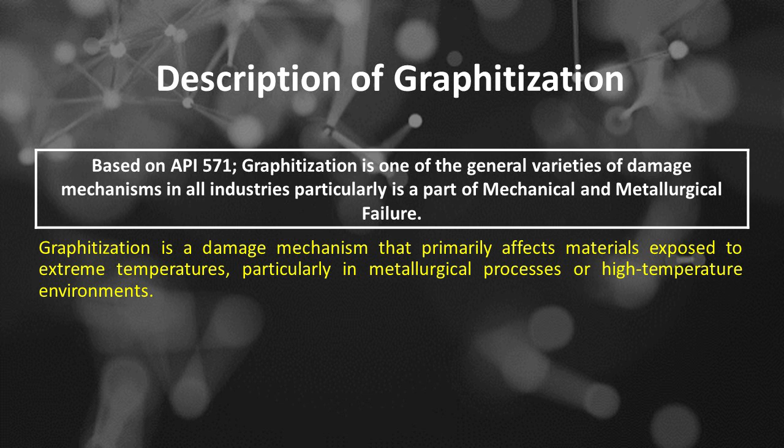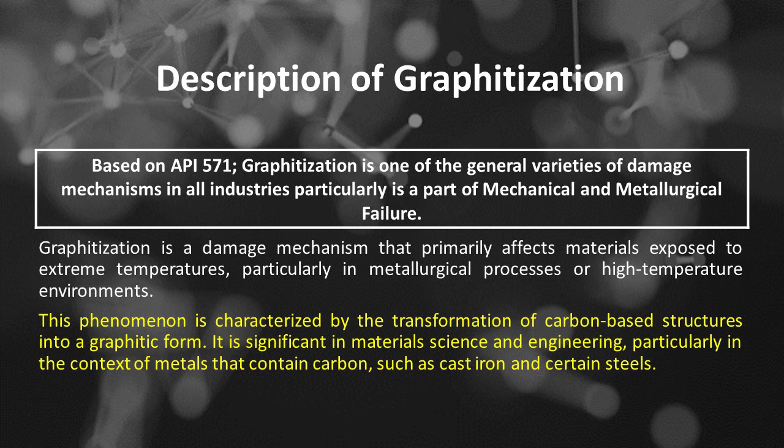Graphitization is a damage mechanism that primarily affects materials exposed to extreme temperatures, particularly in metallurgical processes or high-temperature environments. This phenomenon is characterized by the transformation of carbon-based structures into a graphitic form. It is significant in materials science and engineering, particularly in metals that contain carbon, such as cast iron and certain steels. There are some mechanisms of graphitization.

Number 1 is thermal activation. Graphitization typically occurs at elevated temperatures, usually above 1000 degrees Fahrenheit. At these temperatures, the carbon atoms in a material can become highly mobile, allowing them to rearrange themselves into a graphitic structure.

Number 2 is carbon redistribution. During graphitization, carbon atoms can migrate within the matrix of the material. This redistribution can lead to the formation of graphite particles, which disrupts the original microstructure of the material.

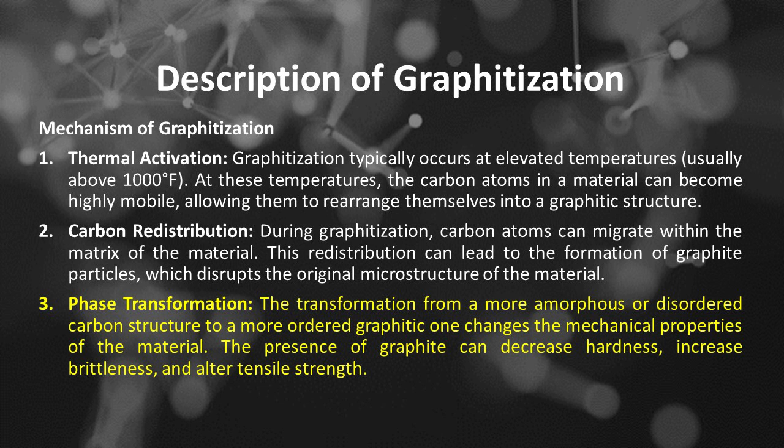Number 3 is phase transformation. The transformation from a more amorphous or disordered carbon structure to a more ordered graphitic one changes the mechanical properties of the material. The presence of graphite can decrease hardness, increase brittleness, and alter tensile strength.

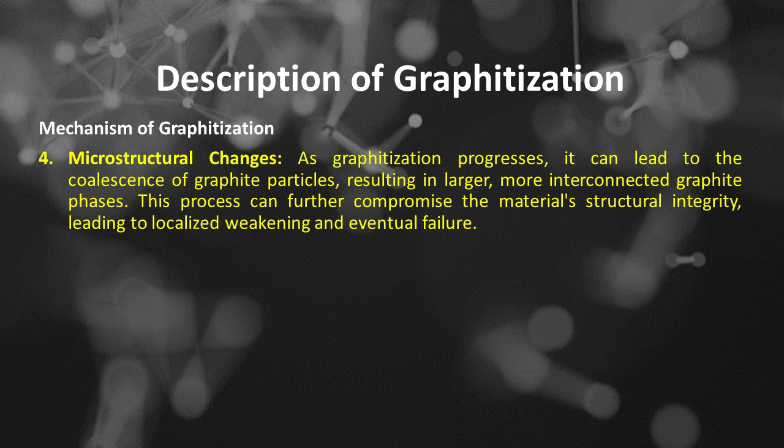Number 4 is microstructural changes. As graphitization progresses, it can lead to the coalescence of graphite particles, resulting in larger, more interconnected graphite phases. This process can further compromise the material's structural integrity, leading to localized weakening and eventual failure.

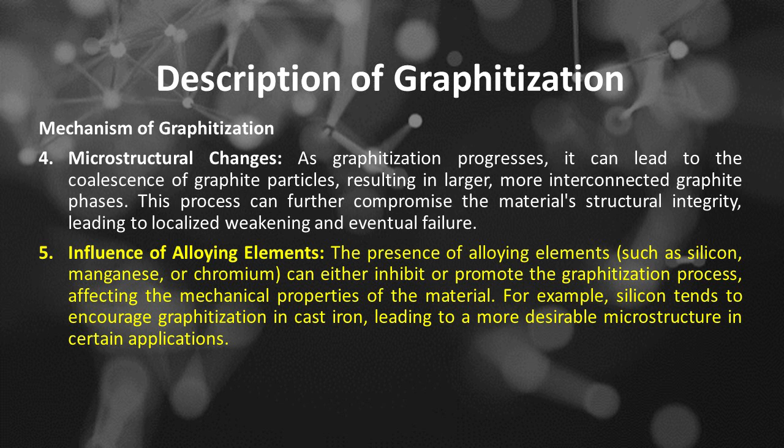Number 5 is influence of alloying elements. The presence of alloying elements, such as silicon, manganese, or chromium, can either inhibit or promote the graphitization process, affecting the mechanical properties of the material. For example, silicon tends to encourage graphitization in cast iron, leading to a more desirable microstructure in certain applications.

Implications of graphitization damage. Number 1 is mechanical property changes. The formation of graphite can significantly alter the mechanical properties of the material, affecting its hardness, strength, and ductility.

Number 2 is thermal conductivity. Graphitic structures typically have high thermal conductivity, which can affect heat dissipation in engineered components.

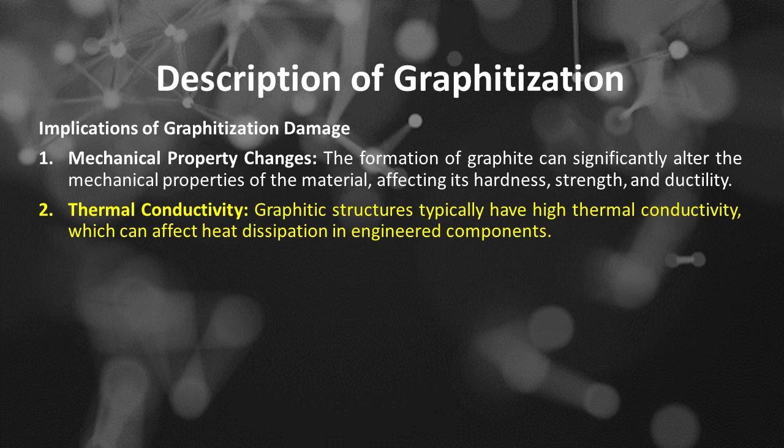Number 3 is fracture behavior. The presence of graphite can lead to changes in the fracture behavior of the material, making it more prone to brittle fracture under certain loading conditions.

Number 4 is service lifespan. In high-temperature applications, graphitization can lead to premature failure of components, impacting their service life and reliability.

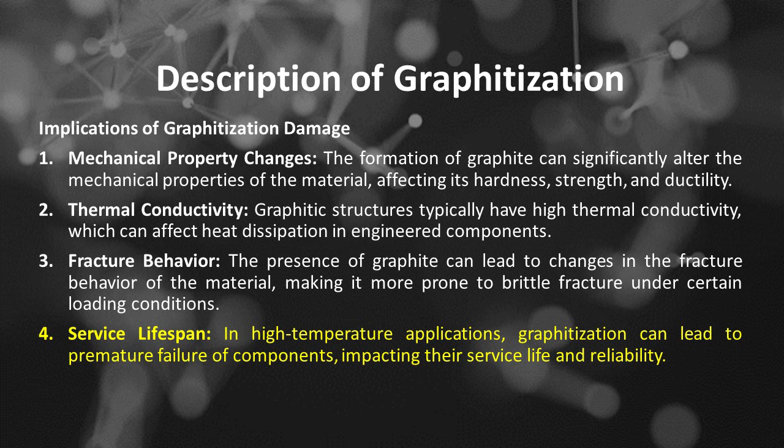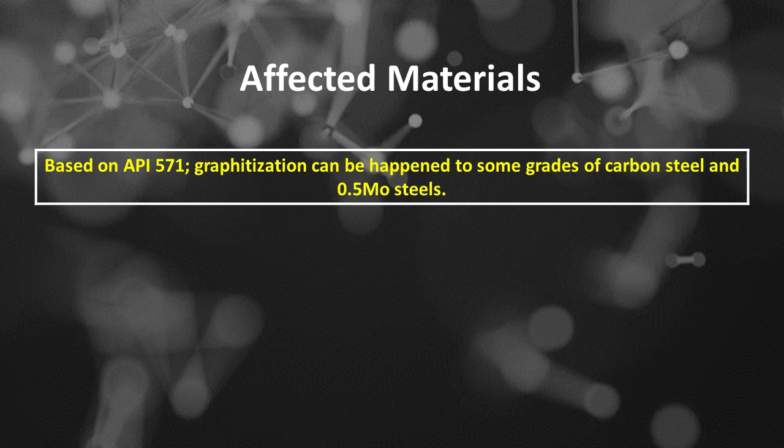Affected materials. Based on API 571, graphitization can happen to some grades of carbon steel and 0.5 Mo steels. Graphitization damage is a process primarily associated with materials that undergo changes in their microstructure due to exposure to high temperatures, particularly in the presence of carbon-containing environments.

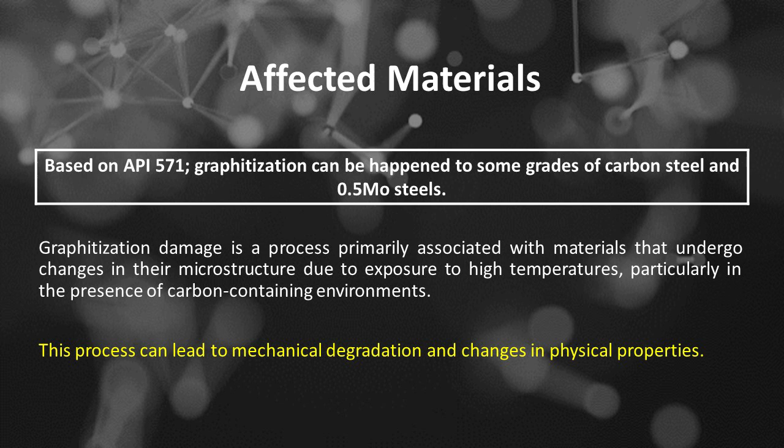This process can lead to mechanical degradation and changes in physical properties. In general, the affected materials typically include: Number 1 is graphite and carbon-based materials. Graphitization directly affects materials that contain carbon, such as graphite electrodes, carbon composites, and various carbonaceous materials used in industrial applications.

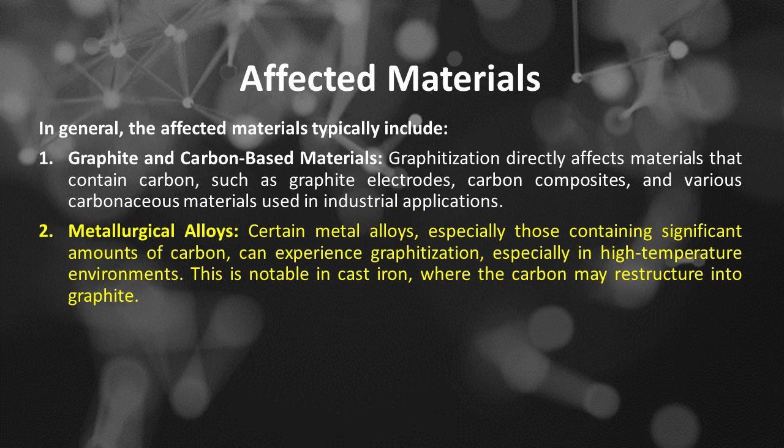Number 2 is metallurgical alloys. Certain metal alloys, especially those containing significant amounts of carbon, can experience graphitization, especially in high-temperature environments. This is notable in cast iron, where the carbon may restructure into graphite.

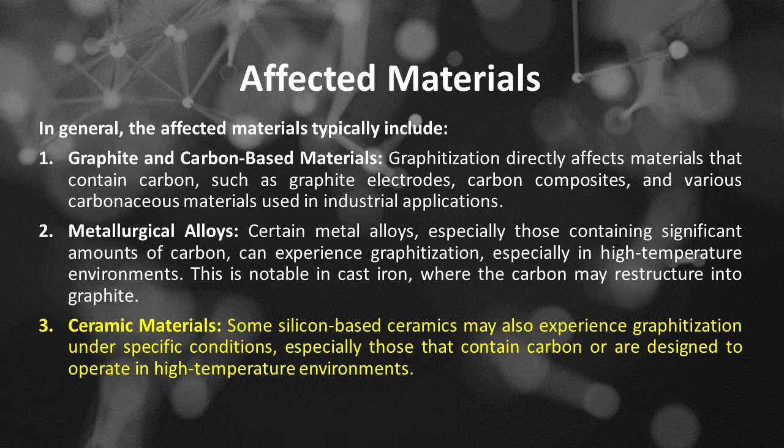Number 3 is ceramic materials. Some silicon-based ceramics may also experience graphitization under specific conditions, especially those that contain carbon or are designed to operate in high-temperature environments. Number 4 is composite materials.

Polymer matrix composites that have carbon fillers or coatings can undergo changes in their properties due to graphitization when exposed to high temperatures, altering their mechanical strength and thermal stability.

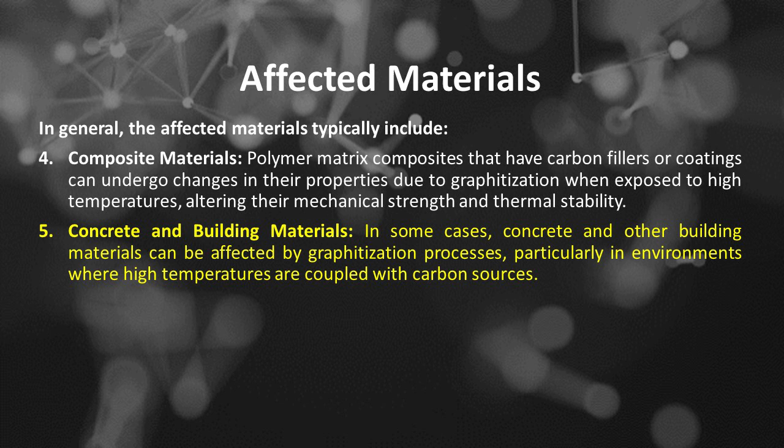Number 5 is concrete and building materials. In some cases, concrete and other building materials can be affected by graphitization processes, particularly in environments where high temperatures are coupled with carbon sources.

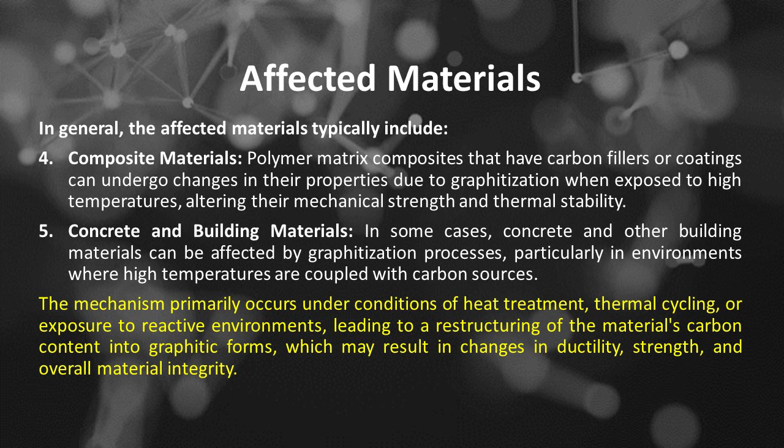The mechanism primarily occurs under conditions of heat treatment, thermal cycling, or exposure to reactive environments, leading to a restructuring of the material's carbon content into graphitic forms, which may result in changes in ductility, strength, and overall material integrity.

Critical factors of graphitization. Graphitization is the process where carbon materials transition to a graphitic structure, and can be influenced by various damage mechanisms, particularly in the context of materials science and engineering. There are several, 12, critical factors that can contribute to graphitization damage mechanisms.

Number 1 is temperature. Elevated temperatures can accelerate graphitization processes and affect the stability of carbon structures. At high temperatures, carbon atoms may rearrange, which can lead to defects and weaken the material.

Number 2 is pressure. The application of pressure can influence the density and structural integrity of carbon materials. In some cases, high pressure can promote graphitization, while in others, it can lead to unwanted structural transformations.

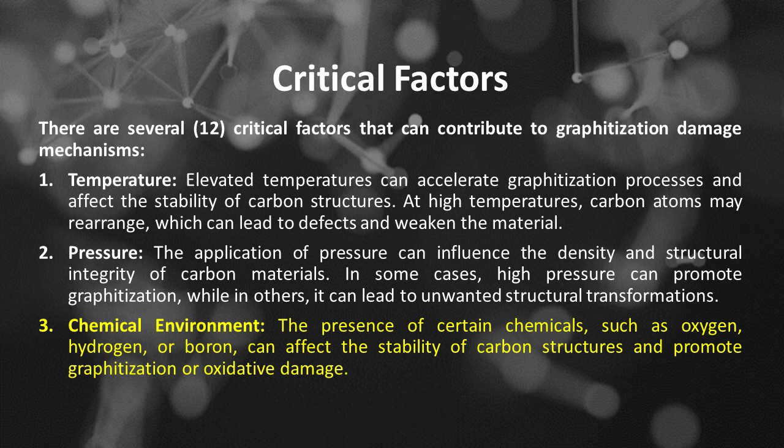Number 3 is chemical environment. The presence of certain chemicals, such as oxygen, hydrogen, or boron, can affect the stability of carbon structures and promote graphitization or oxidative damage. Number 4 is impurities and doping.

The presence of impurities can disrupt the carbon lattice and facilitate structural defects during graphitization. Doping with other elements can alter the electrical and physical properties of the material, impacting its overall performance and longevity.

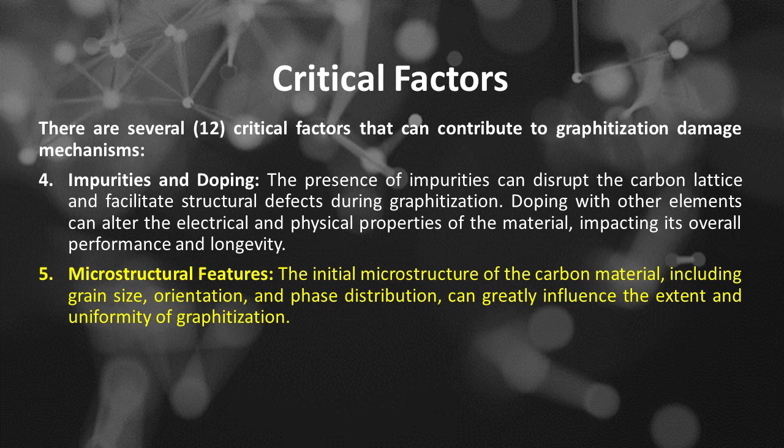Number 5 is microstructural features. The initial microstructure of the carbon material, including grain size, orientation, and phase distribution, can greatly influence the extent and uniformity of graphitization.

Number 6 is mechanical stress. External mechanical stresses can introduce cracks and dislocations in carbon materials, which can act as sites for graphitization or may hinder the process, leading to localized damage.

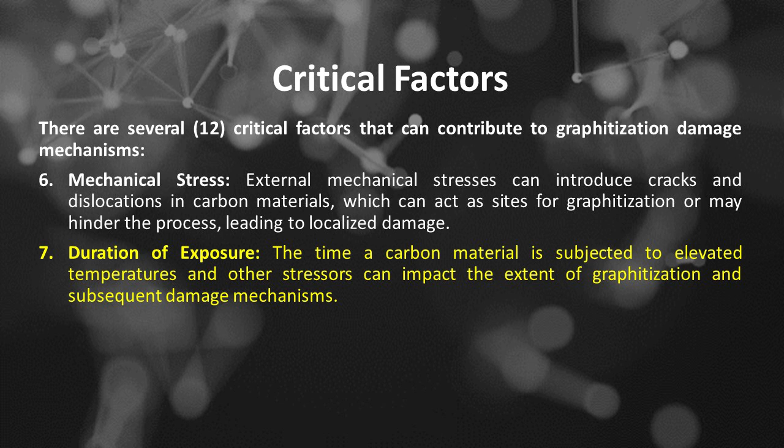Number 7 is duration of exposure. The time a carbon material is subjected to elevated temperatures and other stressors can impact the extent of graphitization and subsequent damage mechanisms.

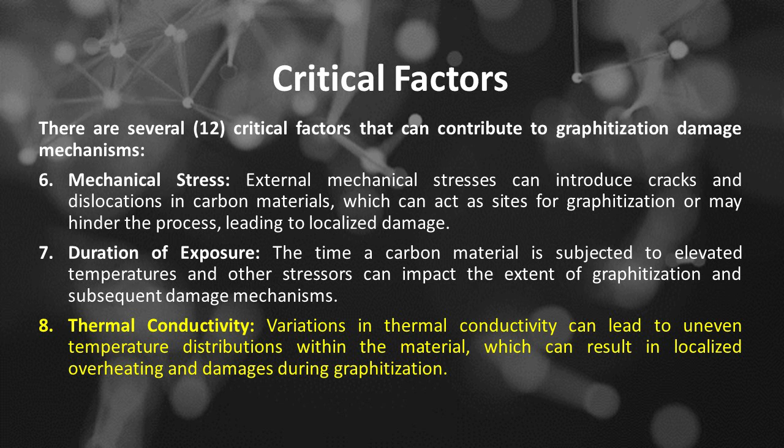Number 8 is thermal conductivity. Variations in thermal conductivity can lead to uneven temperature distributions within the material, which can result in localized overheating and damages during graphitization.

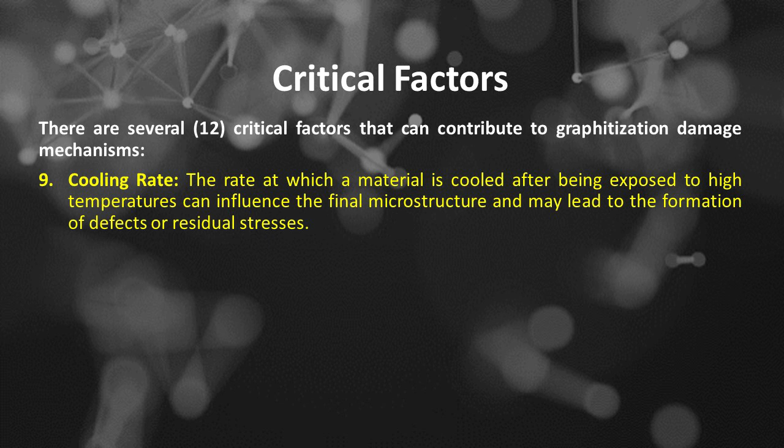Number 9 is cooling rate. The rate at which a material is cooled after being exposed to high temperatures can influence the final microstructure and may lead to the formation of defects or residual stresses.

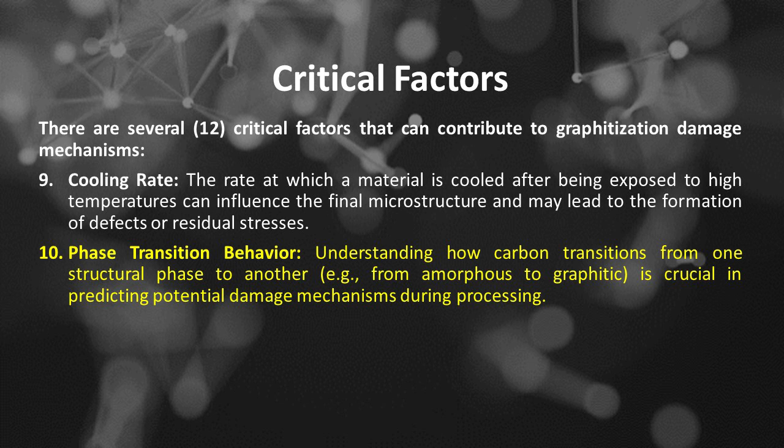Number 10 is phase transition behavior. Understanding how carbon transitions from one structural phase to another, e.g., from amorphous to graphitic, is crucial in predicting potential damage mechanisms during processing.

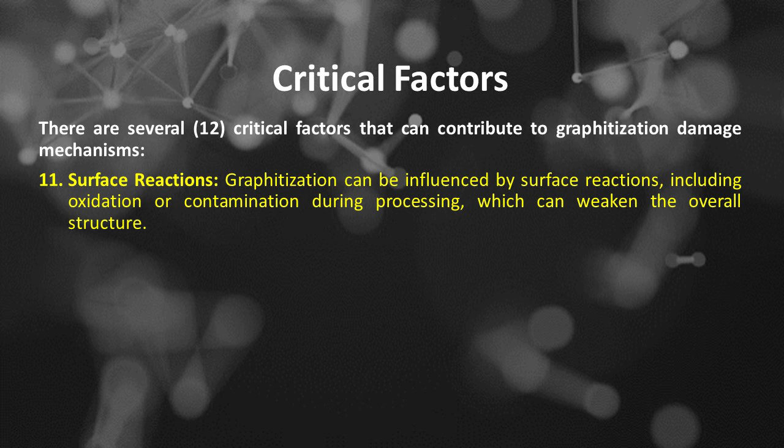Number 11 is surface reactions. Graphitization can be influenced by surface reactions, including oxidation or contamination during processing, which can weaken the overall structure. Number 12 is electrical and thermal properties. Changes in properties like thermal expansion, electrical conductivity, and thermal shock resistance can affect material integrity during the graphitization process.

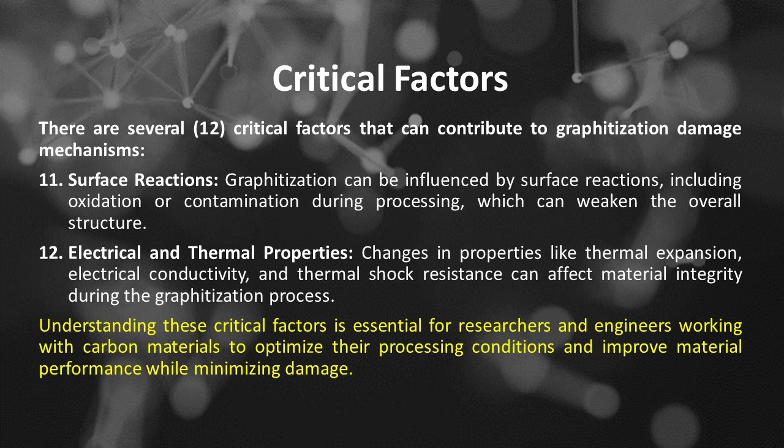Understanding these critical factors is essential for researchers and engineers working with carbon materials to optimize their processing conditions and improve material performance while minimizing damage.

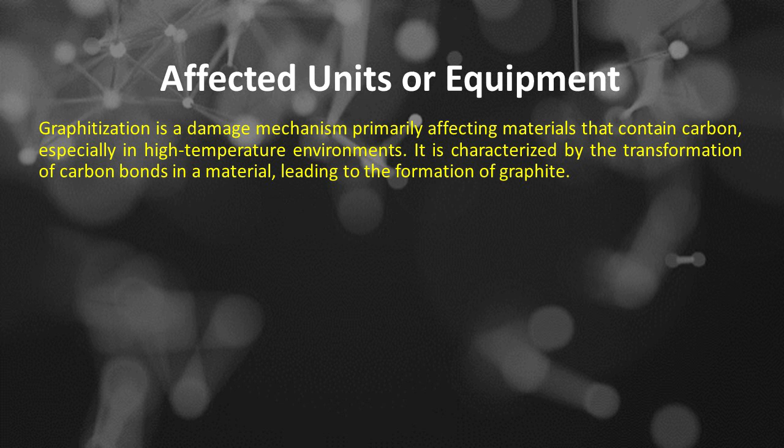Graphitization affected units or equipment. Graphitization is a damage mechanism primarily affecting materials that contain carbon, especially in high-temperature environments. It is characterized by the transformation of carbon bonds in a material, leading to the formation of graphite.

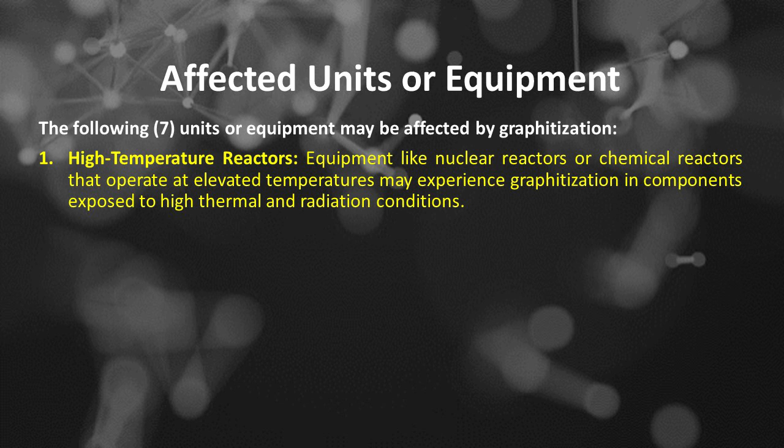The following 7 units or equipment may be affected by graphitization. Number 1 is high-temperature reactors. Equipment like nuclear reactors or chemical reactors that operate at elevated temperatures may experience graphitization in components exposed to high thermal and radiation conditions. Number 2 is heat exchangers.

In certain processes, heat exchangers made of carbon-containing materials may undergo graphitization, affecting their efficiency and structural integrity. Number 3 is pipelines and pressure vessels.

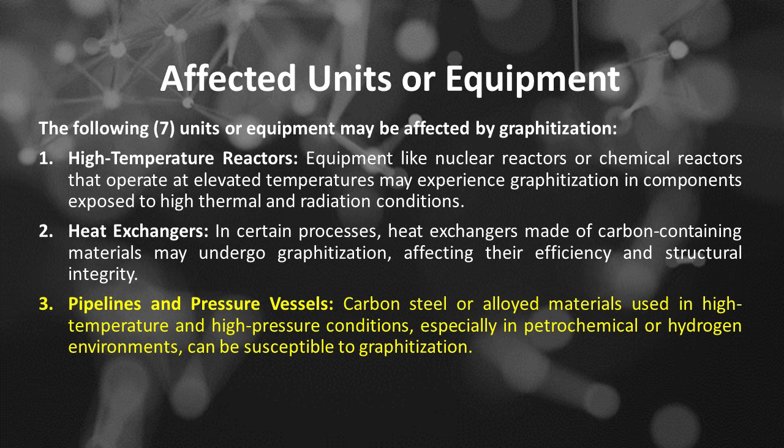Carbon steel or alloyed materials used in high temperature and high pressure conditions, especially in petrochemical or hydrogen environments, can be susceptible to graphitization. Number 4 is boilers.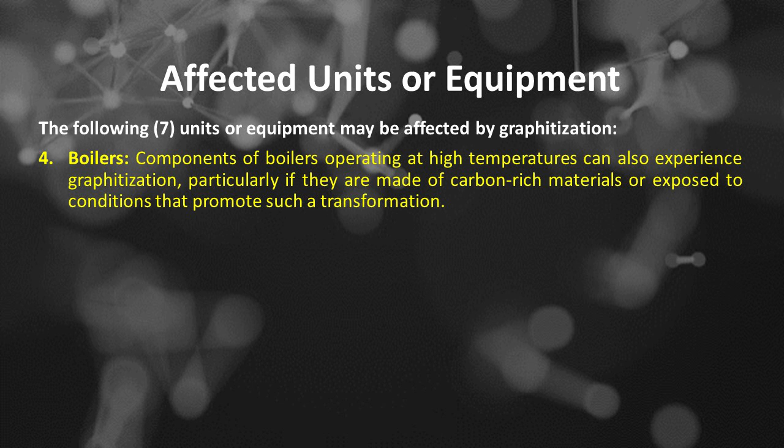Components of boilers operating at high temperatures can also experience graphitization, particularly if they are made of carbon-rich materials or exposed to conditions that promote such a transformation. Number 5 is turbine components.

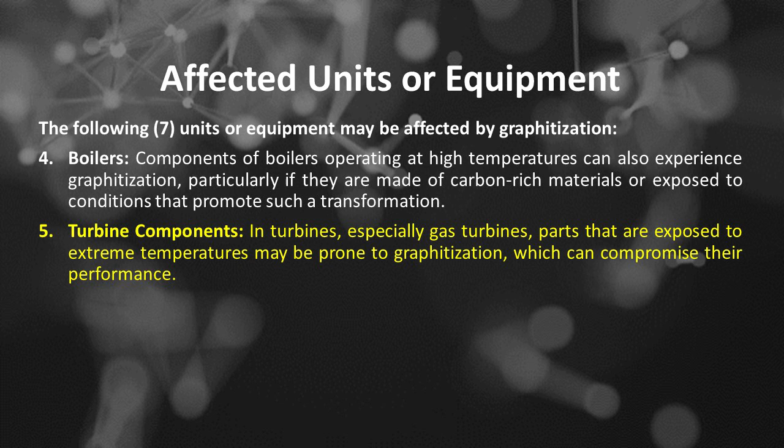In turbines, especially gas turbines, parts that are exposed to extreme temperatures may be prone to graphitization, which can compromise their performance. Number 6 is reforming units.

Equipment used in processes like catalytic reforming in refineries may be at risk due to high operational temperatures and the presence of carbon. Number 7 is coking units.

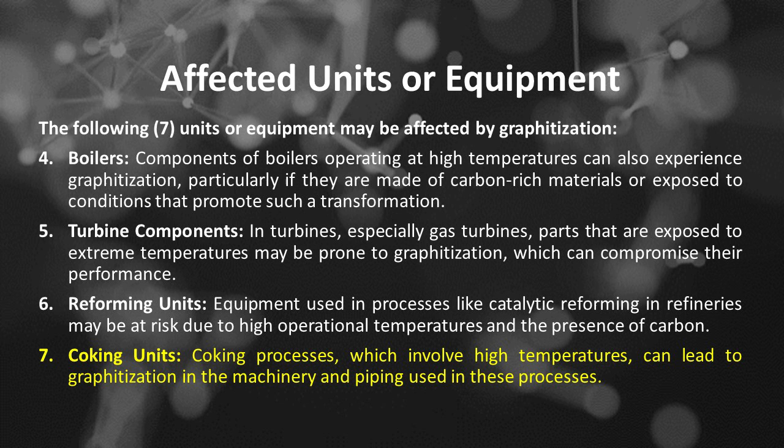Coking processes, which involve high temperatures, can lead to graphitization in the machinery and piping used in these processes. Understanding the potential for graphitization in these units is crucial for maintenance and failure prevention, as graphitization can lead to significant material degradation and operational failures.

Regular monitoring and inspection of affected equipment are essential to mitigate the risks associated with this damage mechanism.

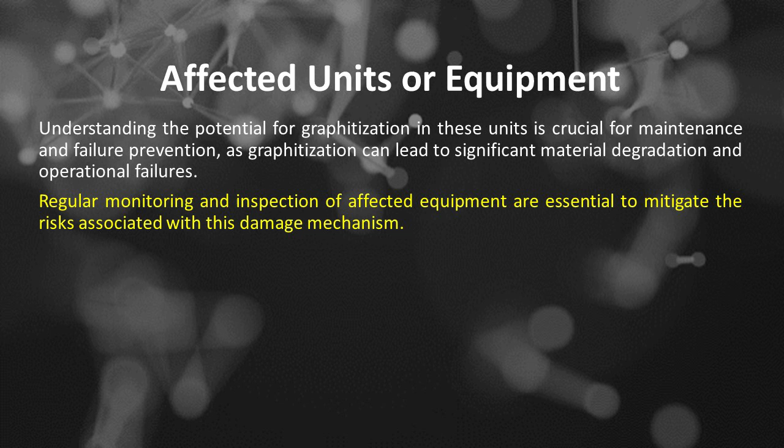Appearance or morphology of damage. Based on API 571: the first is, damage due to graphitization is not visible or readily apparent and can only be observed by metallographic examination, see Figure 4.1 and Figure 4.2.

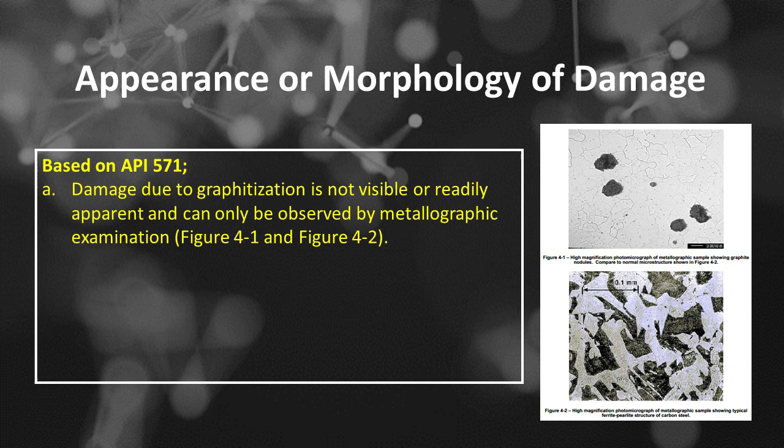And the second is, advanced stages of damage related to loss in creep strength may include microfissuring/microvoid formation, subsurface cracking or surface-connected cracking.

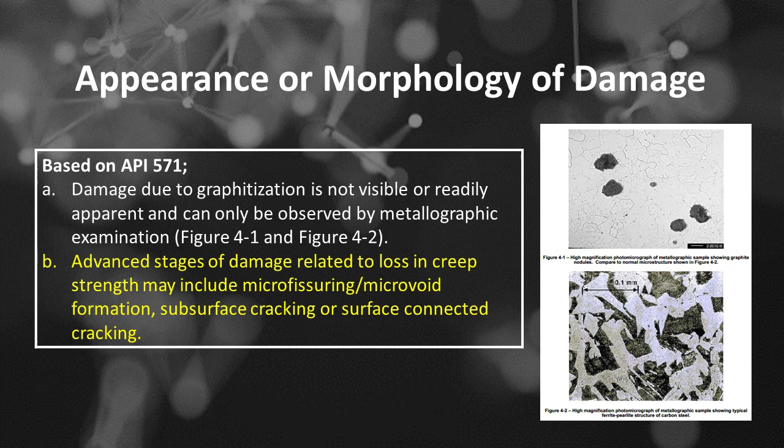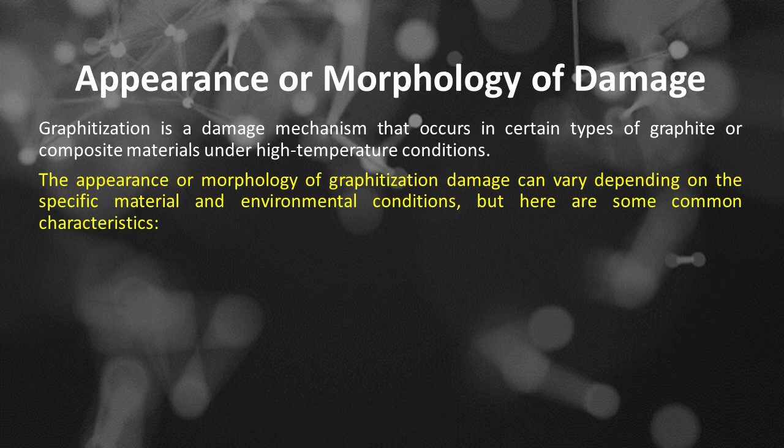Graphitization is a damage mechanism that occurs in certain types of graphite or composite materials under high-temperature conditions. The appearance or morphology of graphitization damage can vary depending on the specific material and environmental conditions, but here are some common characteristics.

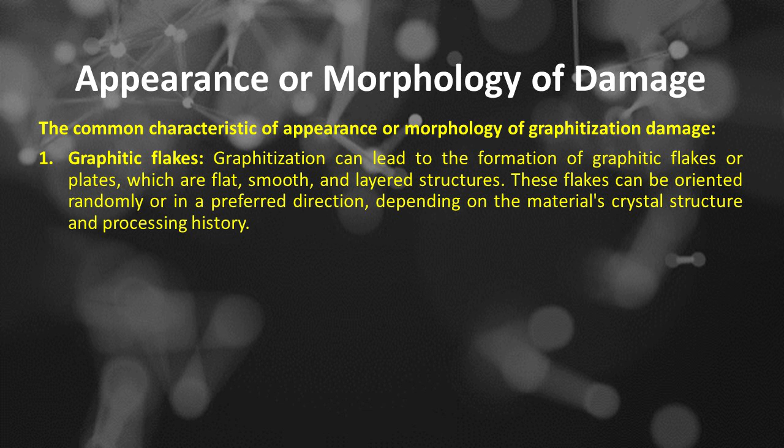The common characteristic of appearance or morphology of graphitization damage. Number 1 is graphitic flakes. Graphitization can lead to the formation of graphitic flakes or plates, which are flat, smooth, and layered structures. These flakes can be oriented randomly or in a preferred direction, depending on the material's crystal structure and processing history. Number 2 is graphite layers.

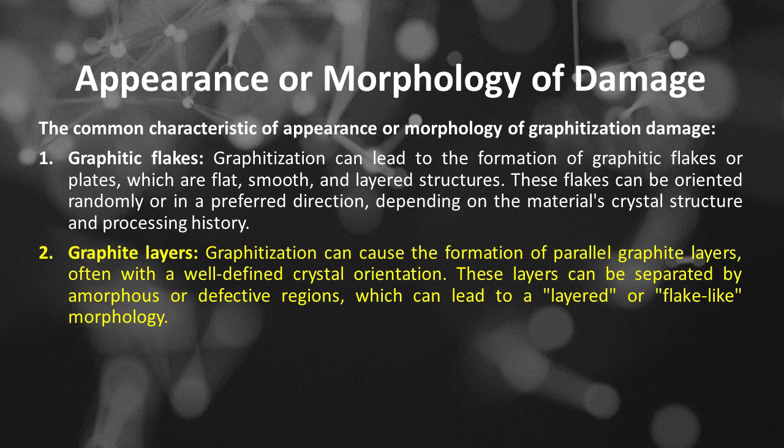Graphitization can cause the formation of parallel graphite layers, often with a well-defined crystal orientation. These layers can be separated by amorphous or defective regions, which can lead to a layered or flake-like morphology. Number 3 is lamellar texture.

Graphitization can result in a lamellar texture, characterized by alternating layers of graphite and other phases or voids. This texture can be observed in both polished and etched samples.

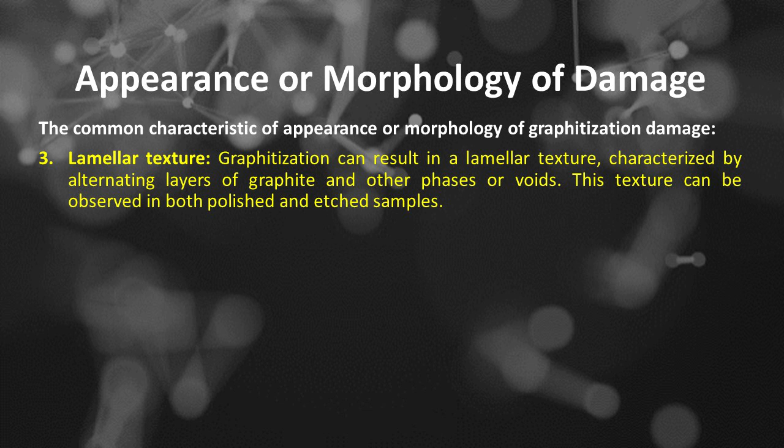Number 4 is graphite nodules. In some cases, graphitization can lead to the formation of graphite nodules or aggregates, which can be several micrometers in size. These nodules can have a distinct shape or morphology, depending on the material's processing history and thermal exposure.

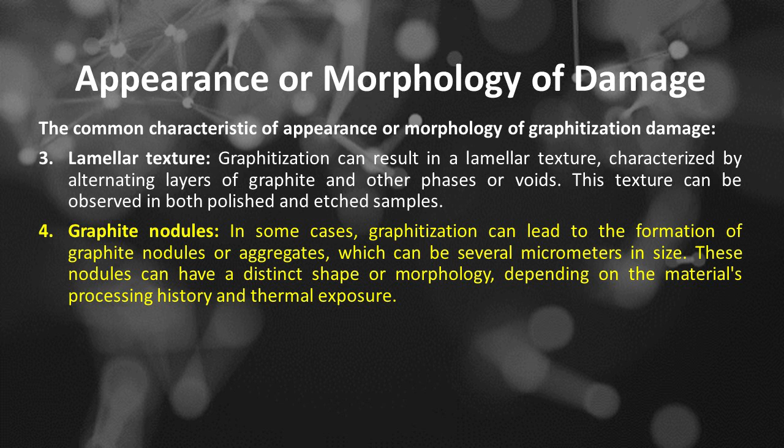Number 5 is graphite fibers. Graphitization can cause the formation of graphite fibers or whiskers, which are thin, elongated structures that can be several micrometers in length. These fibers can be oriented randomly or in a preferred direction, depending on the material's crystal structure and processing history. Number 6 is discoloration.

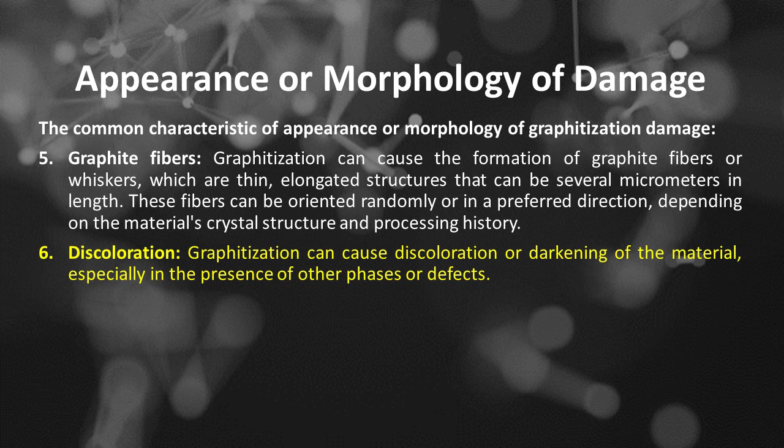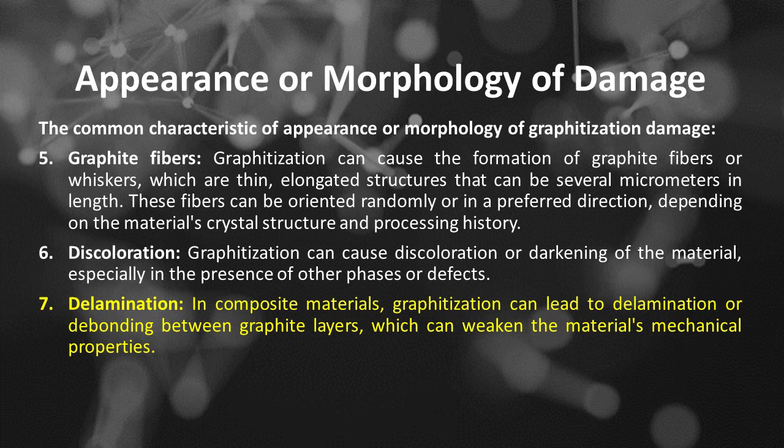Graphitization can cause discoloration or darkening of the material, especially in the presence of other phases or defects. Number 7 is delamination. In composite materials, graphitization can lead to delamination or debonding between graphite layers, which can weaken the material's mechanical properties. Number 8 is microcracking. Graphitization can cause microcracking or the formation of small cracks within graphite layers or between different phases, which can further compromise the material's mechanical properties.

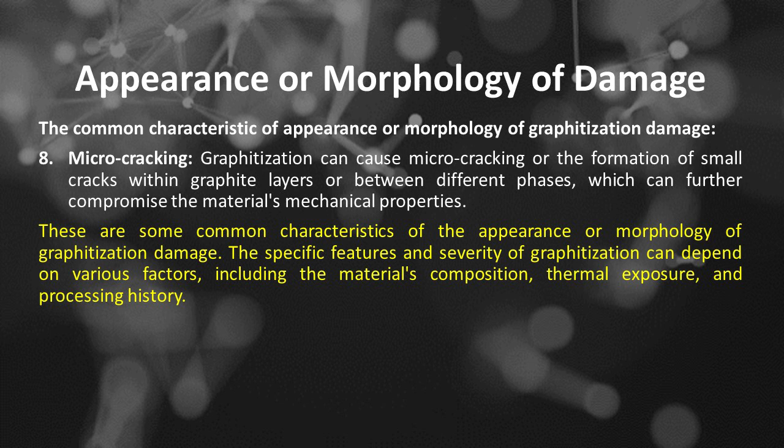These are some common characteristics of the appearance or morphology of graphitization damage. The specific features and severity of graphitization can depend on various factors, including the material's composition, thermal exposure, and processing history. Prevention or mitigation: based on API 571, prevention or mitigation of graphitization is recommended by using chromium-containing low-alloy steels

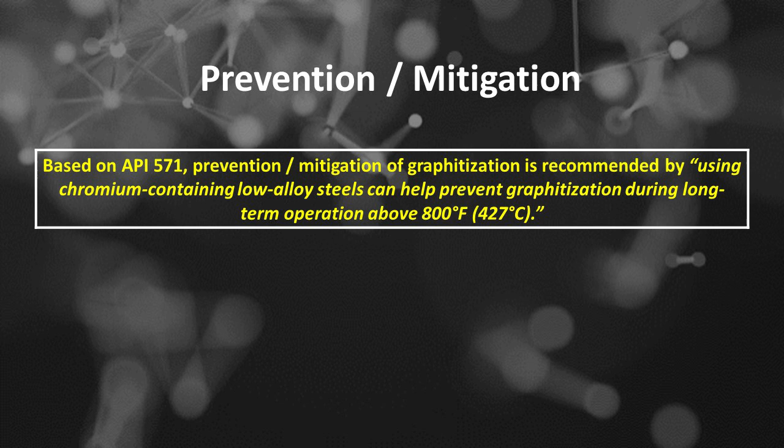This can help prevent graphitization during long-term operation above 800 degrees Fahrenheit, 427 degrees Celsius.

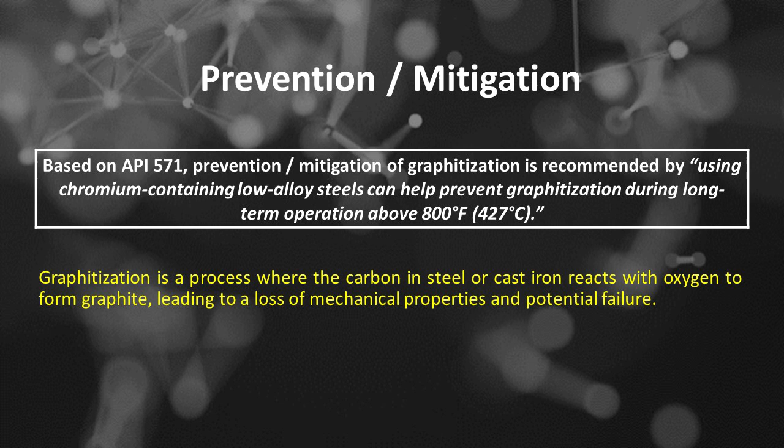Graphitization is a process where the carbon in steel or cast iron reacts with oxygen to form graphite, leading to a loss of mechanical properties and potential failure. The prevention and mitigation of graphitization damage involves several strategies.

Number 1 is material selection. Using high-strength, low-carbon steel or other materials that are more resistant to graphitization can help prevent the issue altogether.

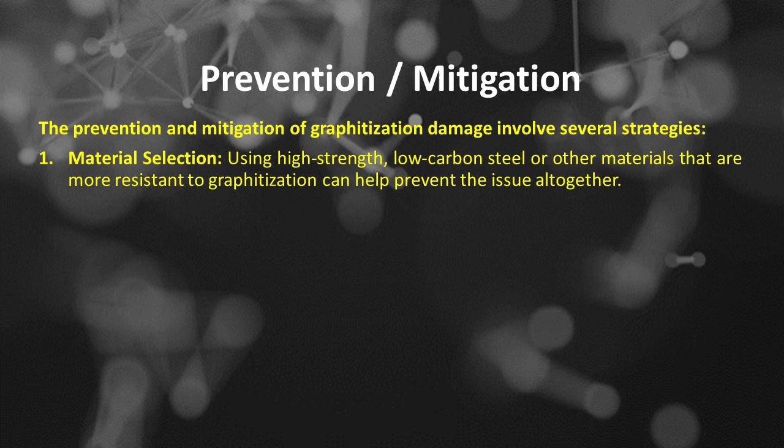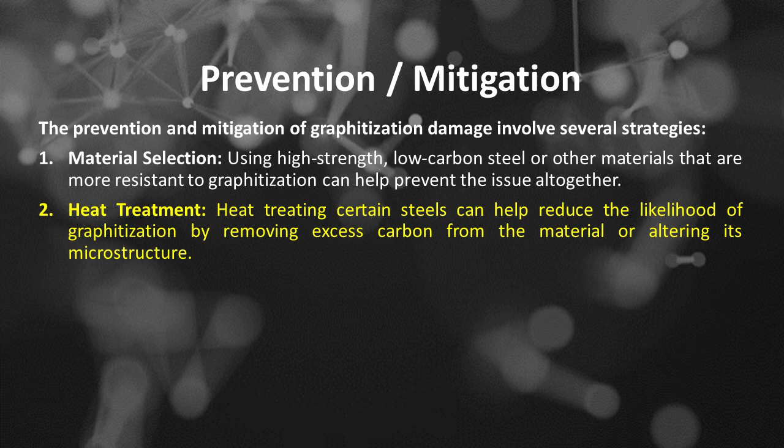Number 2 is heat treatment. Heat treating certain steels can help reduce the likelihood of graphitization by removing excess carbon from the material or altering its microstructure. Number 3 is surface coatings.

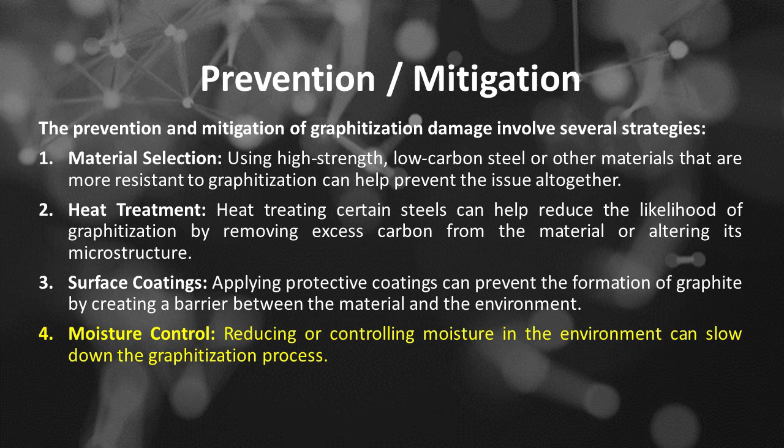Applying protective coatings can prevent the formation of graphite by creating a barrier between the material and the environment. Number 4 is moisture control. Reducing or controlling moisture in the environment can slow down the graphitization process.

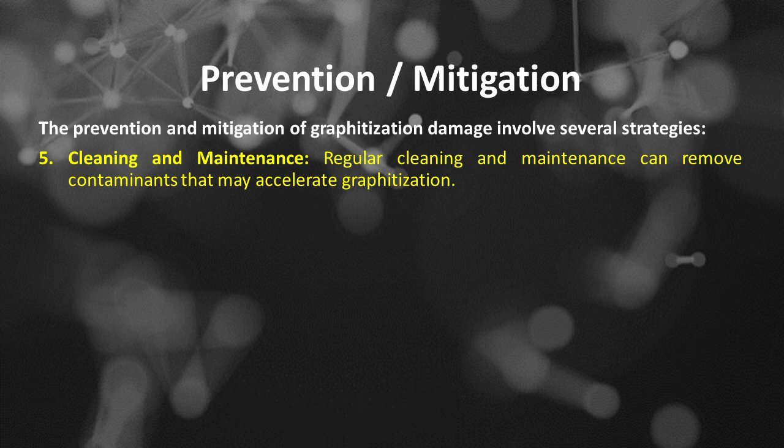Number 5 is cleaning and maintenance. Regular cleaning and maintenance can remove contaminants that may accelerate graphitization. Number 6 is inspection and monitoring. Regular inspections can help identify graphitization before it becomes a critical issue, allowing for prompt action to be taken.

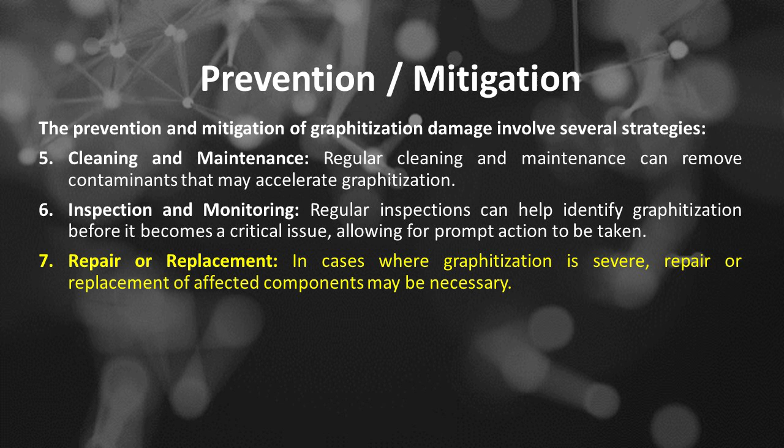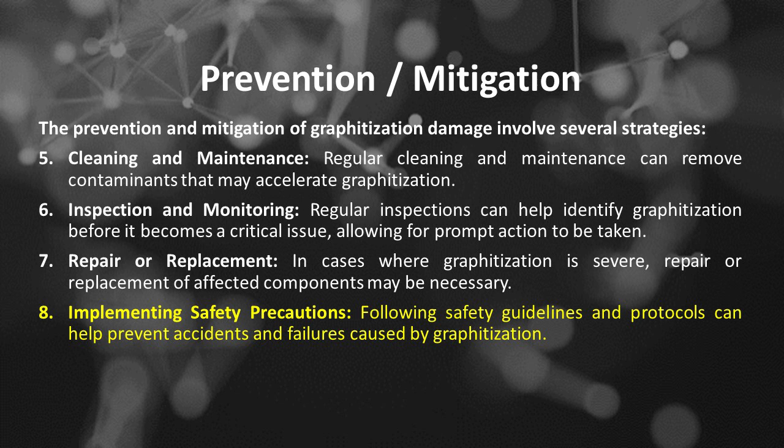Number 7 is repair or replacement. In cases where graphitization is severe, repair or replacement of affected components may be necessary. Number 8 is implementing safety precautions. Following safety guidelines and protocols can help prevent accidents and failures caused by graphitization.

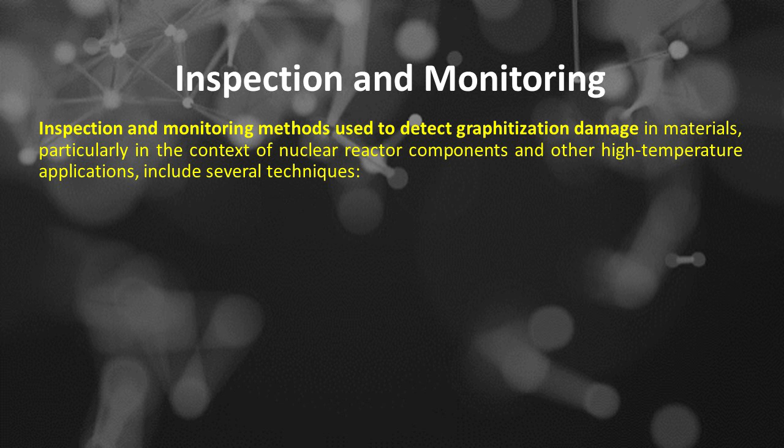Inspection and monitoring methods used to detect graphitization damage in materials, particularly in the context of nuclear reactor components and other high-temperature applications, include several techniques. Number 1 is visual inspection. Basic visual examination can sometimes reveal signs of graphitization, such as surface cracking or changes in surface texture.

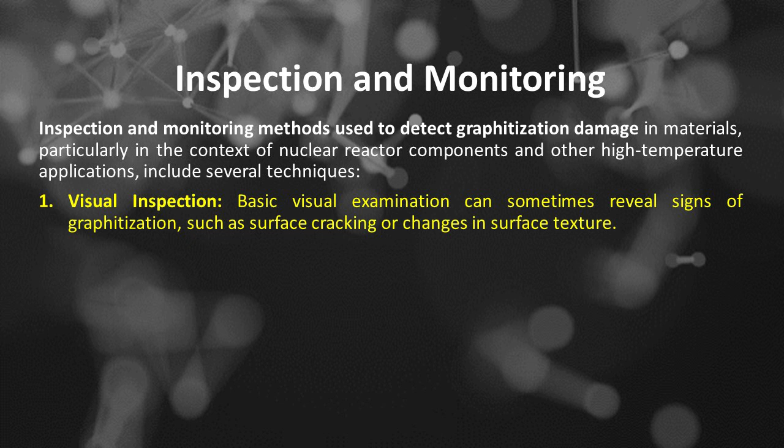Number 2 is ultrasonic testing or UT. This non-destructive testing method uses high-frequency sound waves to detect changes in material properties, including the presence of voids, cracks, or changes in microstructure due to graphitization.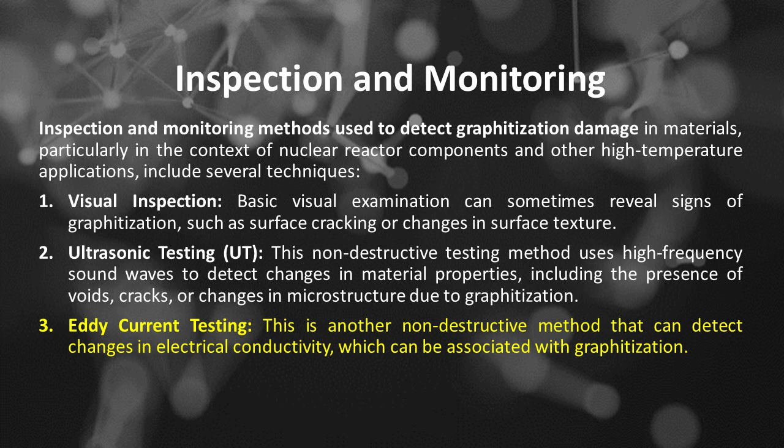Number 3 is eddy current testing. This is another non-destructive method that can detect changes in electrical conductivity, which can be associated with graphitization.

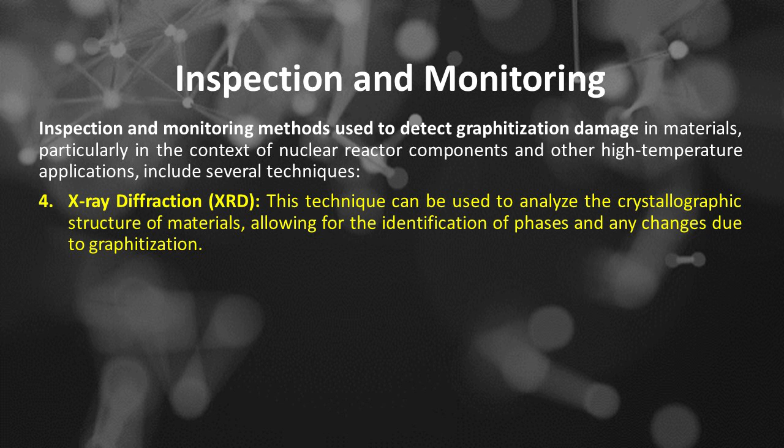Number 4 is X-ray diffraction or XRD. This technique can be used to analyze the crystallographic structure of materials, allowing for the identification of phases and any changes due to graphitization. Number 5 is microscopy.

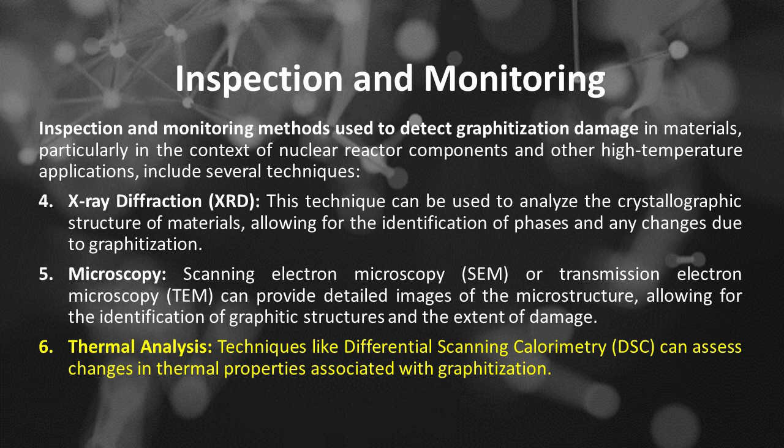Scanning electron microscopy, SEM, or transmission electron microscopy, TEM, can provide detailed images of the microstructure, allowing for the identification of graphitic structures and the extent of damage. Number 6 is thermal analysis. Techniques like differential scanning calorimetry, DSC, can assess changes in thermal properties associated with graphitization.

Number 7 is mechanical testing. Evaluating the mechanical properties of the material, such as hardness or tensile strength, can indicate the effects of graphitization, as these properties can change significantly due to microstructural alterations.

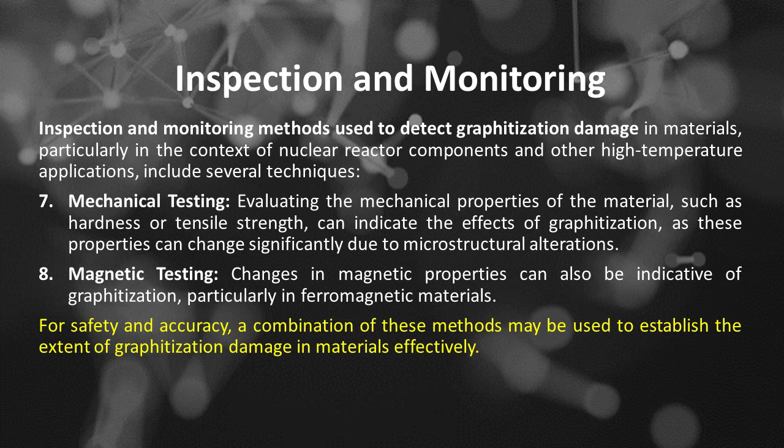Number 8 is magnetic testing. Changes in magnetic properties can also be indicative of graphitization, particularly in ferromagnetic materials. For safety and accuracy, a combination of these methods may be used to establish the extent of graphitization damage in materials effectively.